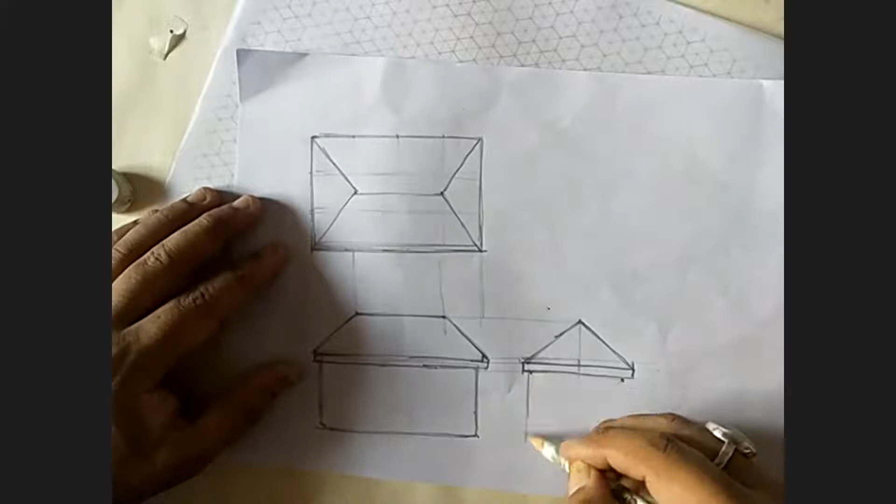Okay, so this is the one which we are seeing. Yeah, okay, I think that is more or less fine. Forget it. That's how it is, all of you, okay.

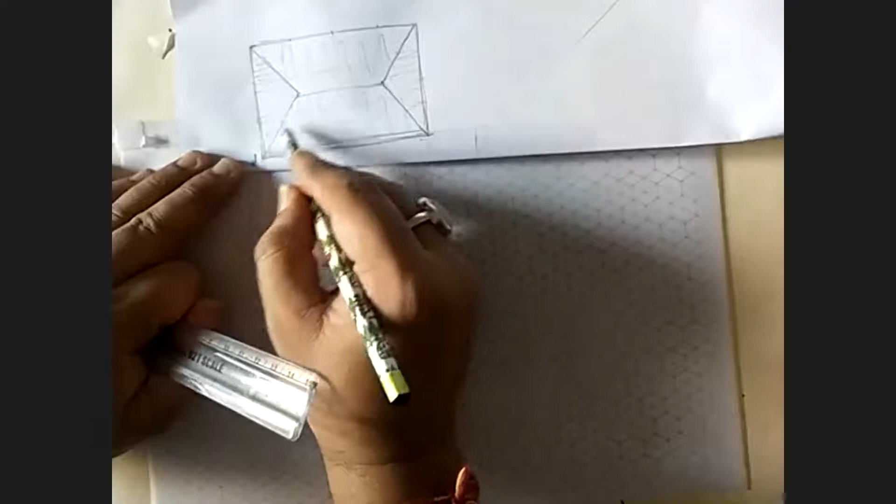So you can see my sheet, right, and you can see this object as well on the top. Yeah, I can see both. So this is the top view. So what we are going to do, we are going to see it from here. This is the point where we are going to see this entire house. We will be somewhere here. So that's what it is - we are seeing the two faces, one is this and one is this. One will be shown and one will be shown to us. And the roof will be shown - roof won't be shown, meaning it won't be visible from below, but I'm saying this is the view where we are. We are on the bird's eye view from this place, looking at it from this side.

Okay, so what will we do now to take it into isometric? We will be taking this.

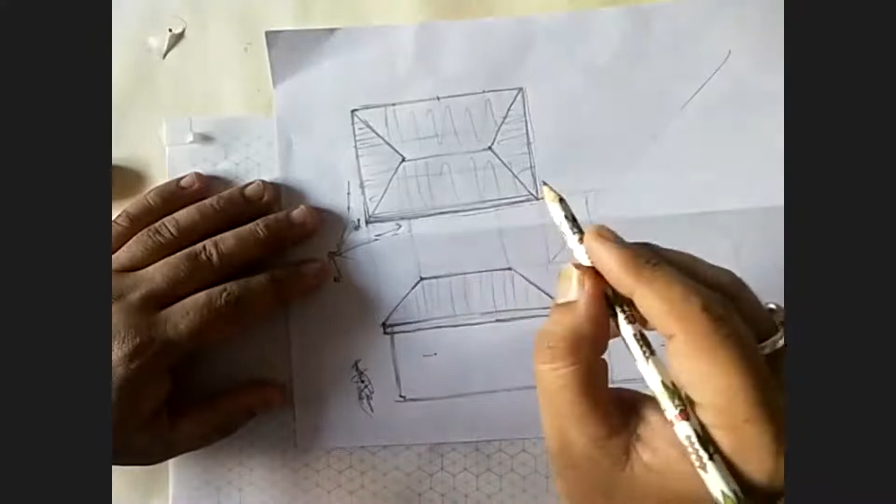First, we will divide - if you see in the drawing, this entire length which is in the front view, this is the front view. And in orthography, what we get to see is the realistic width and the length both. We don't get the height - we only get the height in the front view or in the side view. In front view, we get one of the length, which is this, and the height. In the side view, we get the width - realistic width - and the height. Here we get the width and the length. Now in this length, what we see from the picture, it is divided somewhat like in 4 parts - 1, 2, 3, 4, more or less. So one thing is clear, that length is coming in 4 parts.

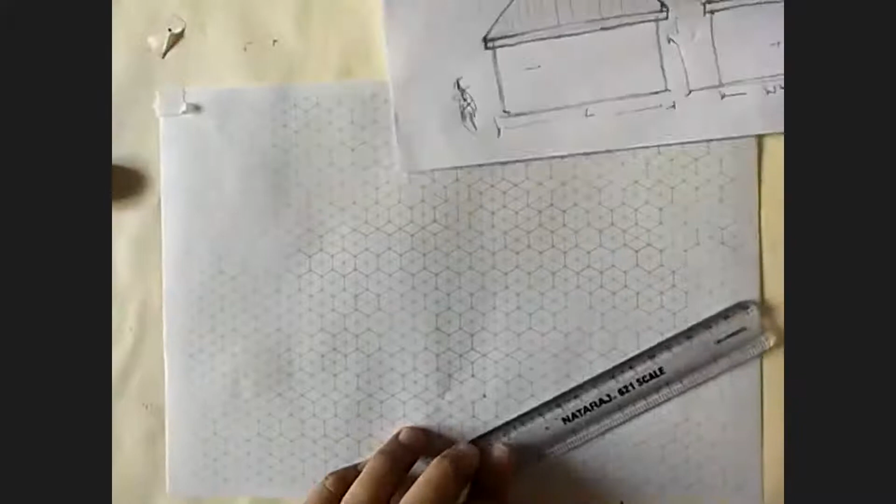Let me just do one thing quickly - let me take it here, which is 4 parts. I take my 1 unit as half, 2 units as my 1 part. Can you see that? 1, 2, this is my 1 unit, 2, 3, and 4. Do you see all? So this happens to be my front view, where I'm taking my 4 units - this will be my front view.

Now come to the side view. In side view, if you see, this is divided into 3 parts - 1, 2, 3. Okay, so let's take that as 3 parts. So we get the real width, which is this one - 1, 2, and 3. So we are getting 1, 2, and 3, that's what we are getting.

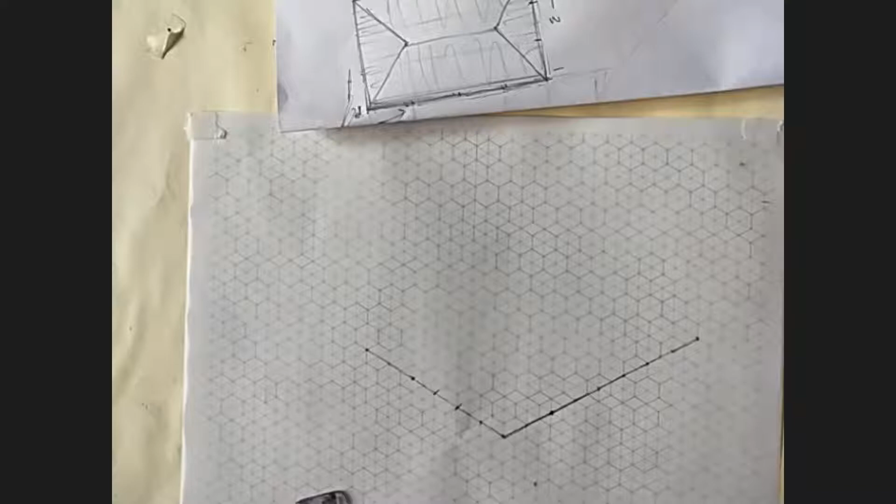Okay, I should do one thing - I think I should take it a little more down because it will cause trouble later. Sorry, I will take it from here. Four... three. Is it fine now? 1, 2 and 3, okay. And this is 4.

Okay, now what do we need to do with this? We got the front's length and the width. Now we've got to see the height. How much is our height? The height that I'm approximately understanding - this is like one complete unit because it is becoming like a square.

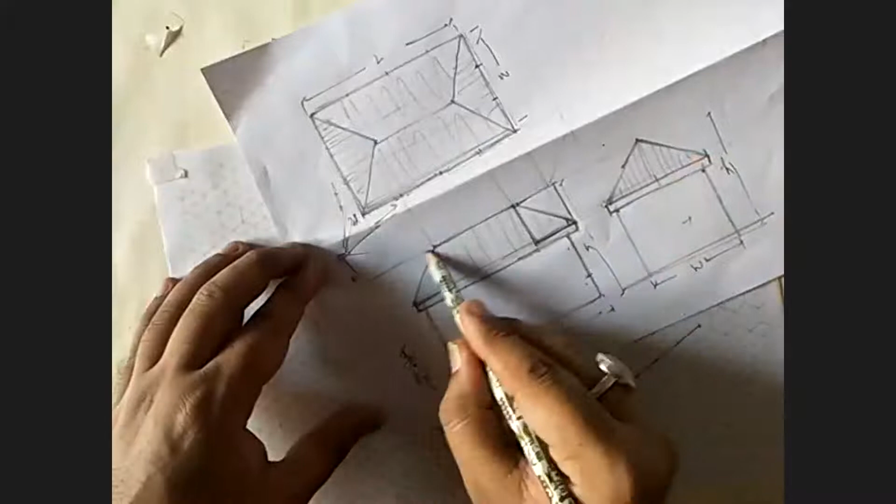Up to here, okay? So it means the height will be 1, and the lower height is approximately 1.5. So 1, 2, 2.5 - that would be the height. Agree with me? 2.5, okay. So what do I do? Here I will do 2.5. So 1, 2 and 2.5 - this would be my actual height.

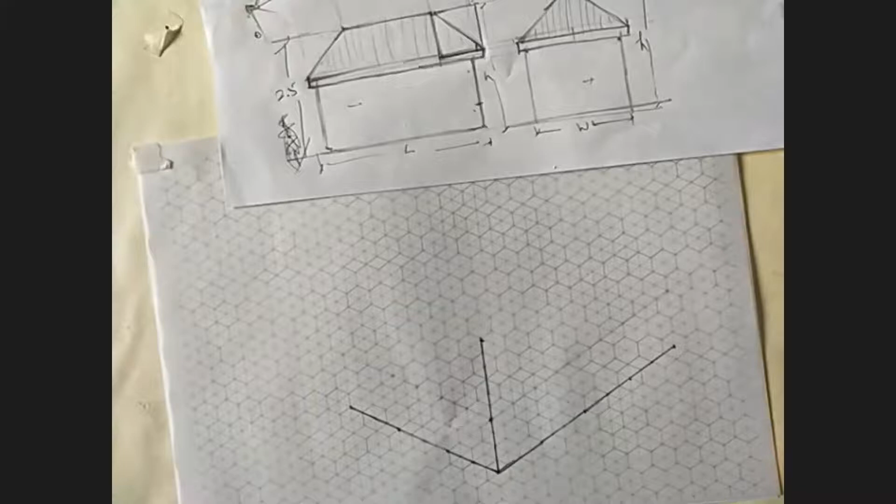Okay, so everything is going to be now - I got the axis. Remember in my isometry, I said there is an axis, and now all the lines which are parallel to this will be the isometric lines. Everything will be parallel to it, which will be kept just from the construction point of view.

So we got this box, and this box will have all the dimensions within it. This is the box. So we got the topmost height, this height, from here to here.

Now what we are going to do? We will be dropping this, and this is like 1 unit which we are dropping with. Where will the 1 unit come? This will be 1, 2. This will be the 1 unit. So here our roof will be.

Now there is something, the most important line for us right now is this line, because due to these lines there will be 4 drop lines which we will be getting. So how to locate this line? If I say this is 1, this is 2, this is 3, this is 4, this line is basically a combination of these two, so it is like 2 will be the line, 2 units.

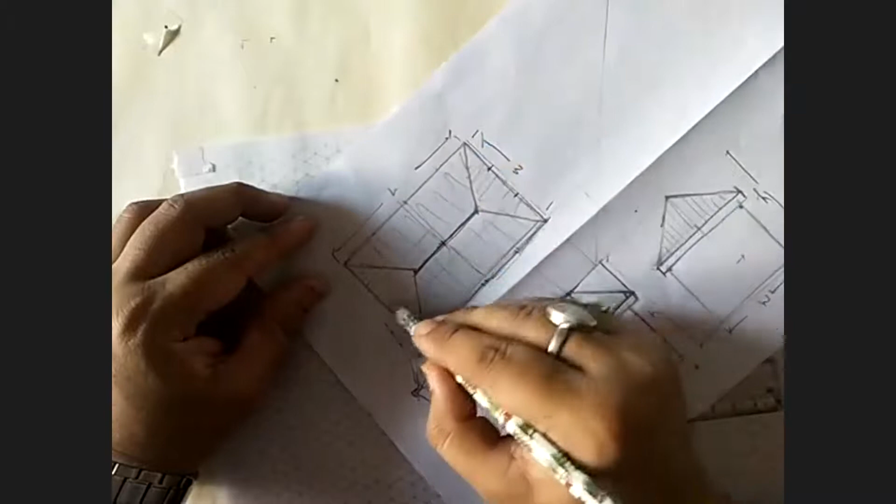Okay, where do we get this? It is right in the center of both. If this is the center, this is the center, it's coming somewhere here. So let's figure out the center of this line. 1, 2, 3, 4. So this happens to be the center.

This will go up there on the top. Now from the 3, the center would be 1, 1.5. So this will be the height.

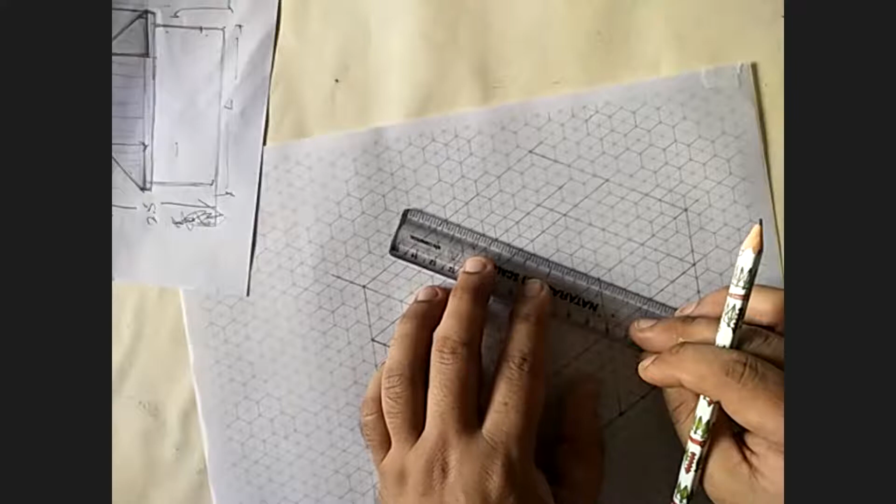And then we take it to the next. Just drop the line, a construction line. And wherever the intersection happens to be, that will be the center point of this line. This is the point which we got.

Okay, so now as I said, it is 2 in nature. So 1 is this, two. So this is that line which we were looking for. This is the line.

Now, what we need to do? We need to have this slope, which means from this point at the corner, at the vertex, the slope line is dropping, all of them. So we will drop it here at this corner. We'll make it light.

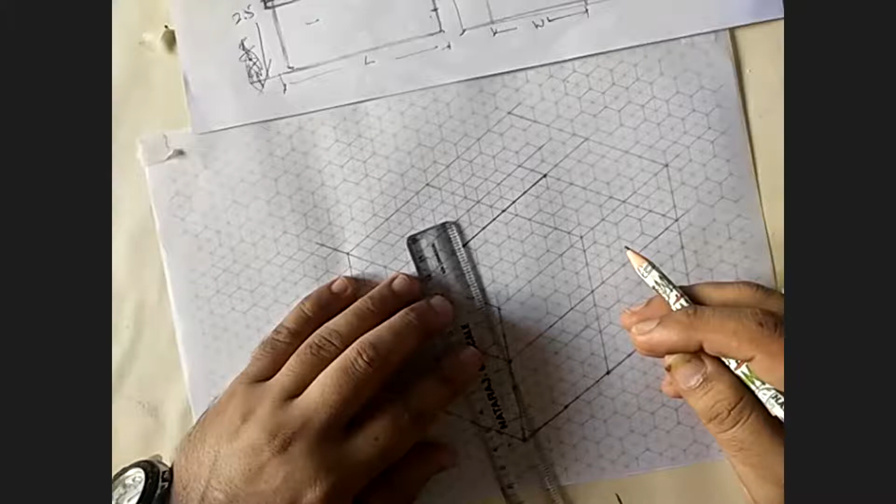And that's where our line will be coming. And the 4th will be coming here at this point, which is this one.

So technically what I've made is correct, but visually this looks a bit skewed. So it is the same fundamental which I told you the other day, why we had to use isometric as compared to axonometric, because that looks more skewed and isometric looks more realistic. Like in this case, imagine if instead of this line it was 1.5 or maybe 1, then it would have looked much more realistic, because then I would have some kind of a drop from here to here. Understood?

Are you understanding, or is there some comprehension problem somewhere? No sir, hello? Yes sir, we understand. Understanding, sir. Fantastic.

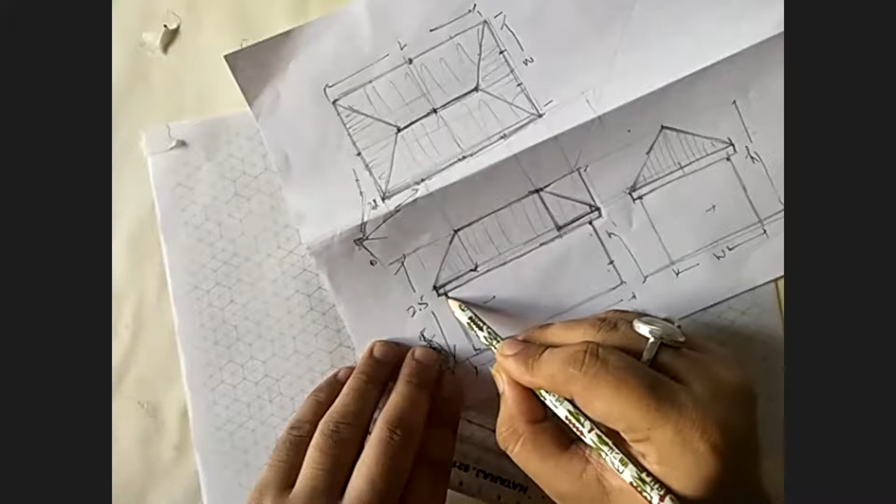Great. Now, this is the point. If you notice it carefully, it is not at the edge, it is inside this line. So I believe that this wall is falling somewhere here, with the dotted line. Do you agree with me?

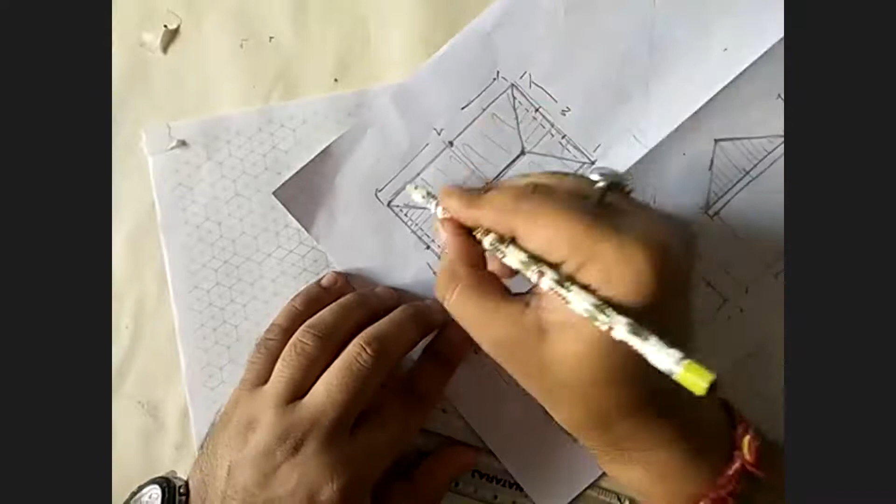Yes sir. Great. Okay, so that's how this entire thing is. There is another element which I get to see, this putty kind of a thing, there's a drop kind of a thing. So somehow I feel that this drop and these two are similar in nature. This and this will be having more or less the same dimension.

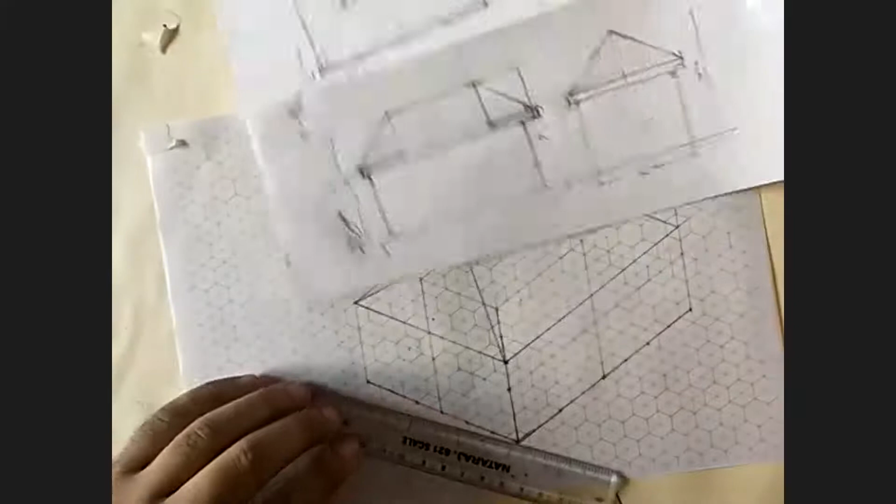Okay, agree with me? Can I take it like this? Yes sir. Okay fine, so let me do one thing. How much would that be if I say so? So I guess this should be somewhat like, just for my sake, if I divide this into this, so will be 2, 3, 4. Probably I will say it is 1/4 of the 1 unit.

If it is 1, so 1, 2, 3, and 4. For my ease, I will take it as 1/4 of 1 unit. Can I freeze it here as 1/4 of 1 unit? Yes sir, yes sir, okay.

Similarly, as I said, it is 1/4 of 1 unit, and this will also be 1/4 of the 1 unit, because more or less they are the same in nature in terms of their dimensions. I'm picking them like this.

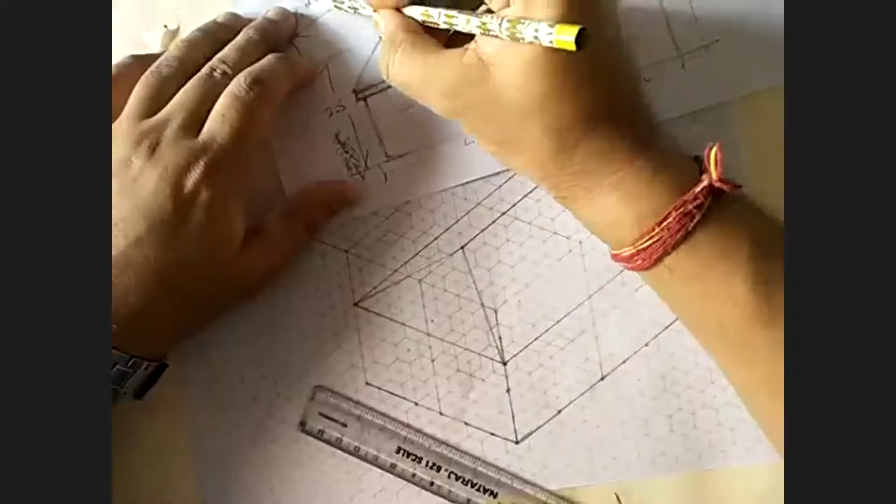Okay, so what I do, if this is my extreme corner, this is my vertex, this is my corner, so where is this? The intersection of this is 1/4 inside. Okay, so let me do one thing.

Let me first figure out if this is my 1. Okay, this is my 1 unit. So 1/4 will be 1, 2, 3, 4. So my 1/4 will be here. This is my 1/4. And where would this other 1/4 be? Okay, let me check.

Okay, so let's say this is my 1 unit. So 1/4 will be this one. Similarly, 1/4 will be this one, and wherever they are intersecting, this is the point for me. And here also, similarly, the point will be here, and similarly here it will be this.

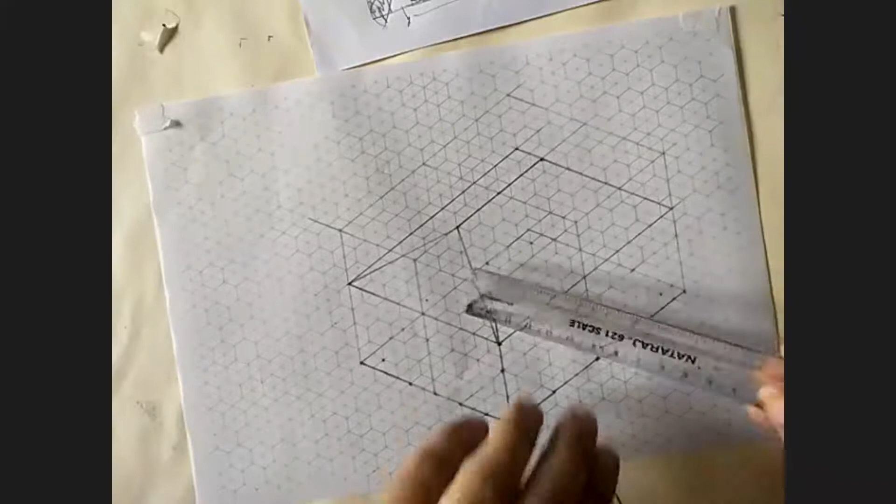Okay, and this is one complete thing. One is this, so 1/4 will be this. This is the point. So what I'm going to get is actually this is the wall which I will be getting. This is the area, my wall is actually falling here.

So this is my hut. Okay, now what do I need to do? 1/4, as I said, it will be going down, right? So where will this be coming? This will be coming at 1/4.

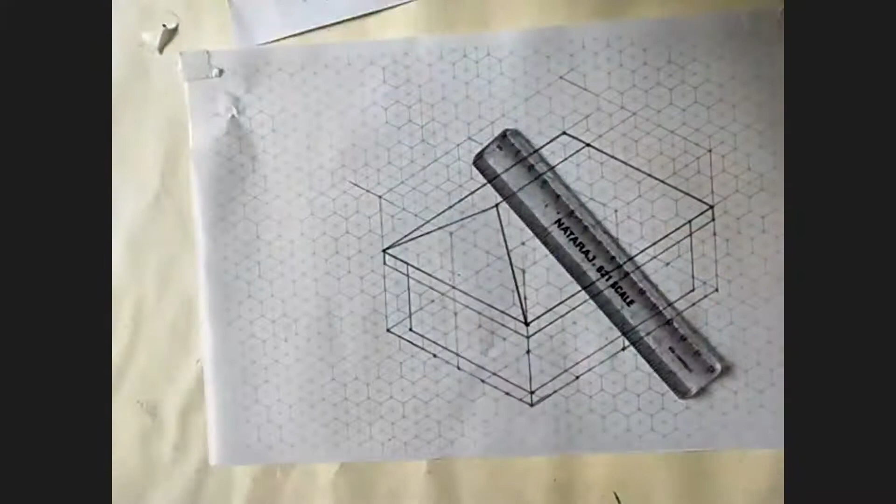Anything? Easy? Tough? Yes, sir, yes, sir. With the grid, it's easy.

इसने क्या किया, अभी अपना सेट स्क्वायर साइड में रखा 45 डिग्री एंगल पे। जिस मोमेंट इसे 45 डिग्री एंगल पे रखा, सेंटर वाला 90 डिग्री होगा, ऑटोमेटिकली इधर 45 डिग्री होगा। You don't have to measure it. एक 45 पे रख लिया। Why is it realistic? As I told you, 90 डिग्री पर हम बनाते हैं, and then it goes at the 45 डिग्री एंगल।

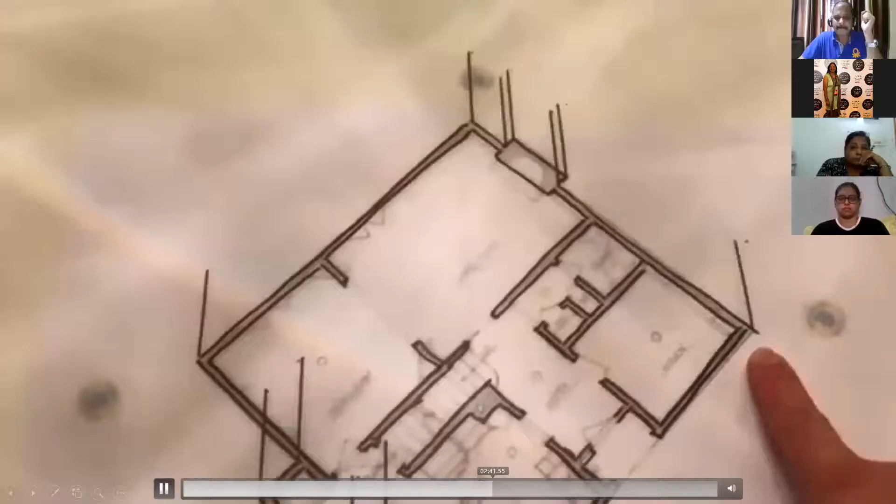इसमें हाइट ले लिया, इसने हाइट को मेजर कर लिया, दैट्स इट।

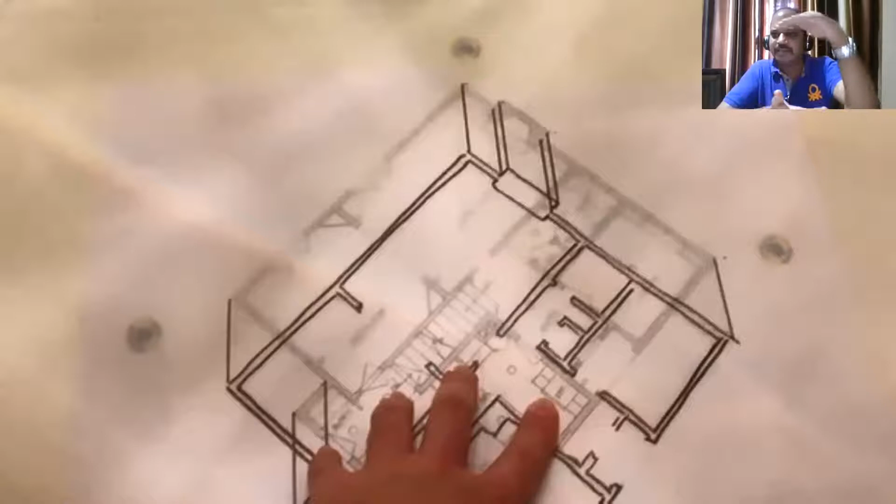Okay, so what is he saying? That floor plan becomes the ceiling plan. The moment you elevate it with a particular distance, it is fine. It is absolutely fine. But this is easy when you are having the floor and the ceiling same. But if you are not having the roof, because roof is a separate part, maybe we can take it off, and when we are showing only the wall portion, then it is absolutely fine. But inside the wall and roof, we need to place some points there.

Jasmine, you are on mute. राज, जैसे आपने प्लान में डॉटेड लाइंस ऐड की थी, जब आप वो डॉटेड लाइंस ऐड करके उस प्लान को लगाओगे, तो आपको वो लाइंस भी मिलेंगी। तो वो पॉइंट्स आपको ऑटोमेटिकली मिल जाएंगे। यह बेसिकली सिर्फ प्रैक्टिस की बात है।

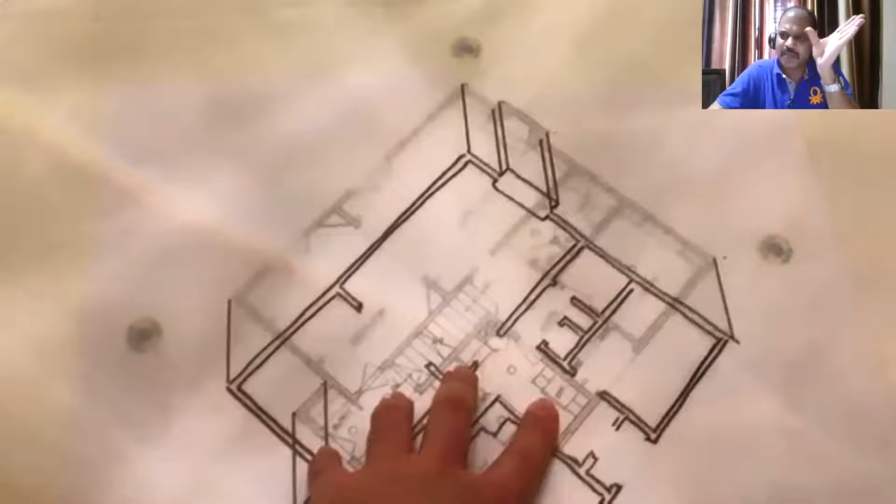और प्लॉटिंग पता होनी चाहिए कि आपका ऑर्थोग्राफिक की जो ग्रिड होती है, उसको आप आइसोमेट्री के ऊपर कैसे प्लॉट करते हो, दैट इज द मोस्ट इंपॉर्टेंट पार्ट। अगर ऑर्थोग्राफिक में एक यूनिट है, because there are some details which you need to show, or you are having a very big sheet of isometric, so you can take one unit of ortho as 2 units in the isometric. You can scale it up or down, it's all up to you. So this is the crux of the entire exercise which I had shown you.

Now I will be showing you something which is how to draw the circle.

ओके अभी हम क्या करते हैं, हम सर्कल को आइसोमेट्रिक व्यू पे ले जाने के लिए पहले ऑर्थोग्राफिक लेते हैं और उसके बाद उसे नीचे इस पे ले जाते हैं। अगेन व्हाट वी ट्राई टू डू विद आवर गट फीलिंग्स, बट देयर इज अ सर्टेन वे एंड सर्टेन रूल विद व्हिच वी डू इट।

Okay, so again, I'm going back to my sheet, just bear with me once again.

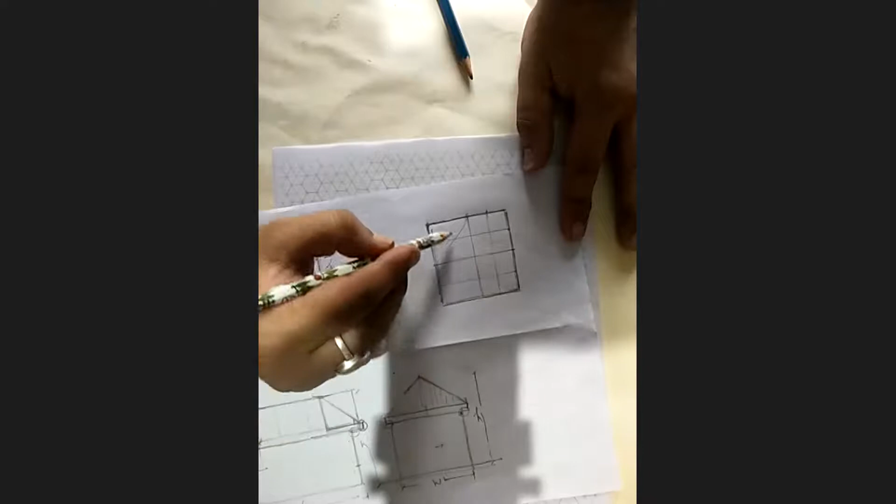So first of all, the basic unit would be the square which I will be taking. Let me just divide it into half. Okay, I divide it into half like this. Again further I will divide it into half. If I want, I can further divide it into half, the lightest one.

I hope till here it's all fine, right? Okay, that's not the line to be considered, forget about this.

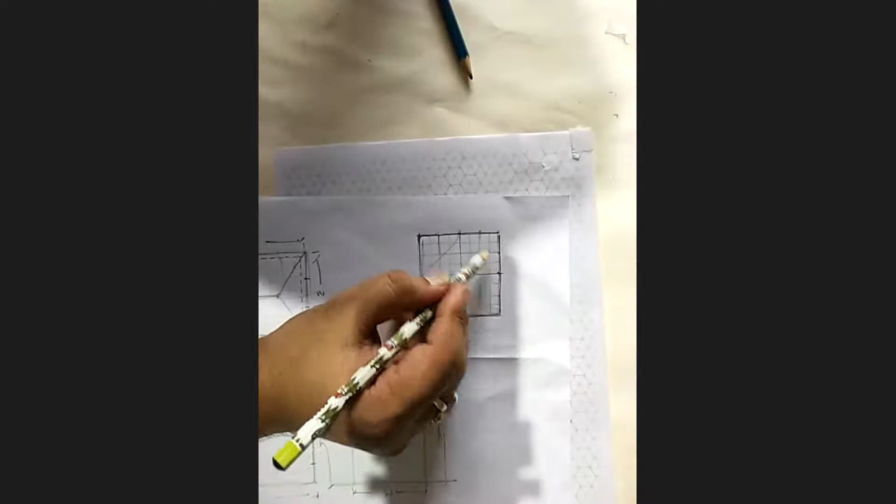So what I do, when I do the round, when I do the circle out here, there are 4 points which the circle will be touching at, these 4 points. Agree with me? Not the vertex, but at the edge. And it is going to be something like this for sure. Now, how do I get this curve? That is the most important part. So what do I do on this one?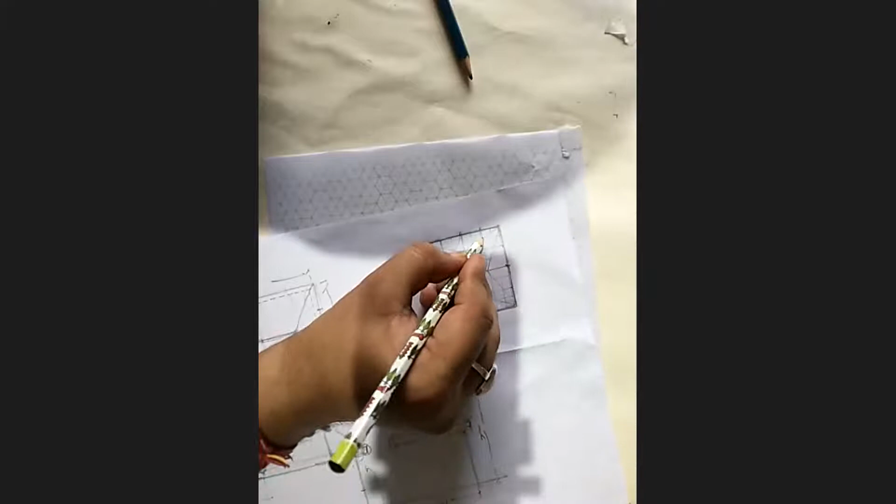I will make a star here, and join it at this point. The more divisions you do, the smoother the curve will be. But just to get a gist of it, this is the best way. When we do something like this, what is happening is I'm getting an intersection out here - intersection of this line and this vertical line, and another intersection here.

So what do we do? From this point, I've got this curve. Do you see that? Agree with me? Hello, are you there with me? Yes, okay, keep giving me some feedback, say yes or no, so that I know you people are there.

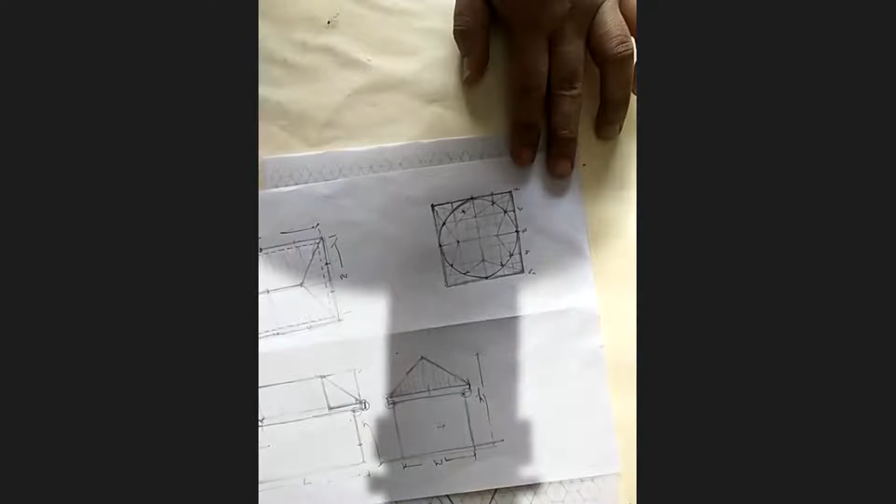Okay, so that's how the plotting has been done of the circle on the orthographic sheet. Now the same needs to be taken onto the isometric grid. If I say this is 1, 2, 3, 4, 5, similarly 2, 3, 4, 5. Let's take it there and see what happens.

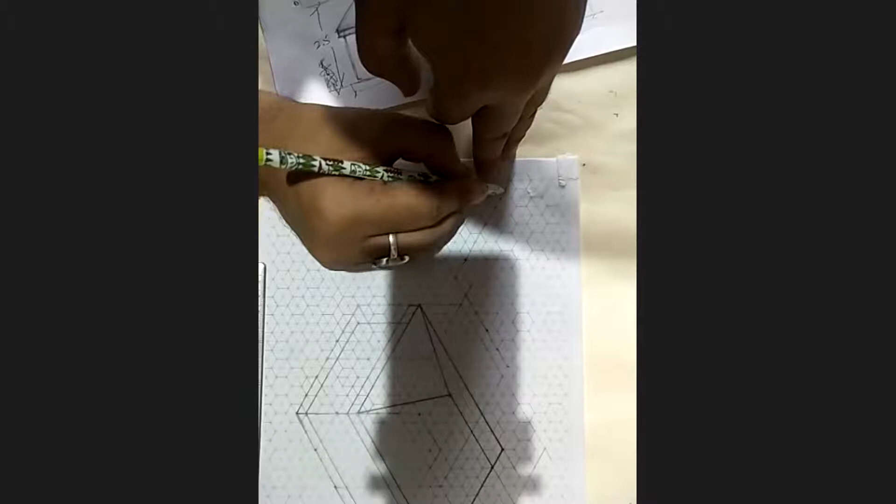I will take it from here. This is my 1, 2, 3, 4, 5. 1, 2, 3, 4, 5 - no, it will go out. Okay, this is here. 1, 2, 3, 4, 5. So big.

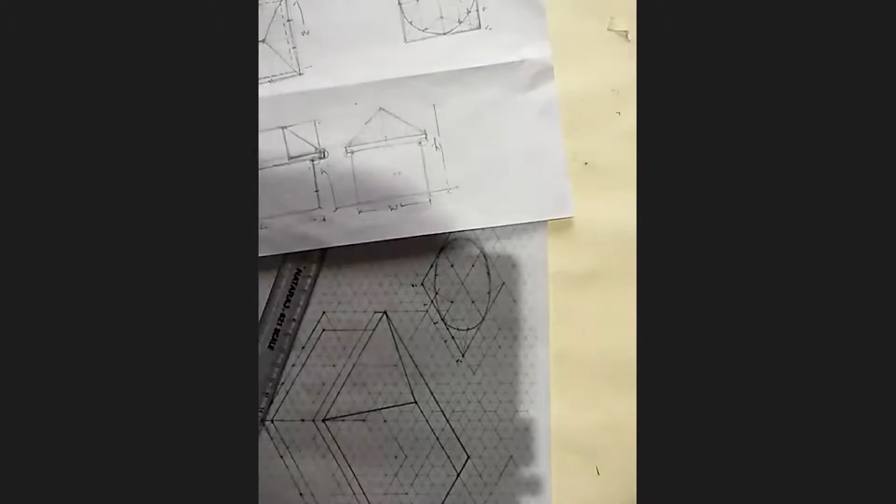This is our circle. That's how we have plotted the circle on this grid. Okay, just see what happens if I put it out here. What happens if I put it here? Let me try it a little higher up. Will that give me something smoother? I don't know, let me see.

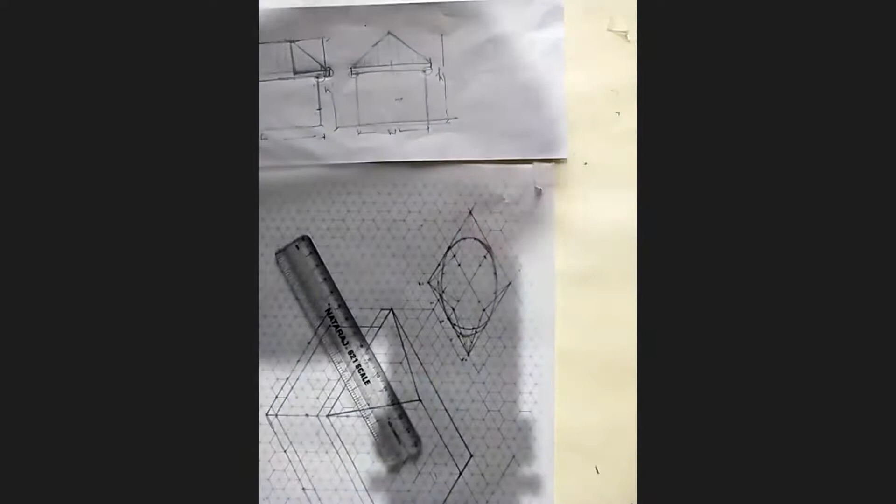There's a possibility with the outer one as well, which I can figure out, but that will be a little too complicated, and that is basically to get a much more smoother curve. But I would suggest just stick to one right now and work on the internal one - just one point, I think that's best, otherwise it will be too complicated.

Okay, so that's where something like this was done earlier. Okay, let me go on to the main screen now.

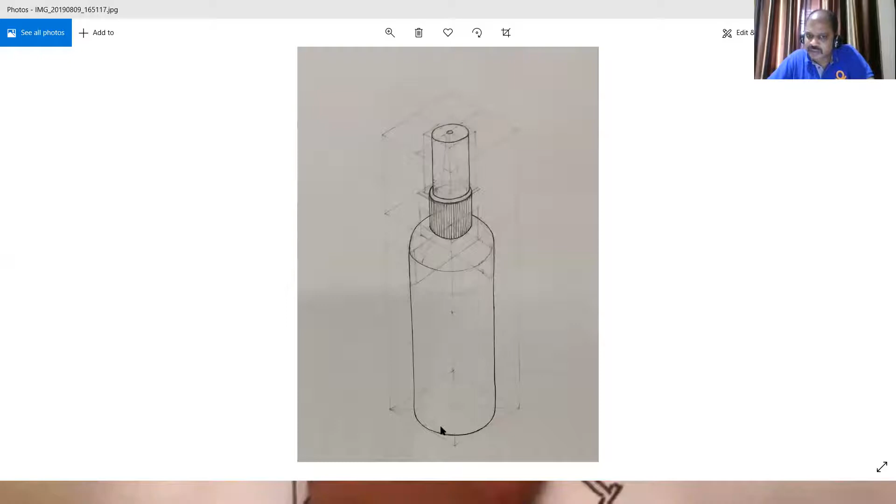अब इसमें जैसे एक प्रोडक्ट को लिया है, उस प्रोडक्ट पे उन्होंने किस किस चीज को प्लॉट किया है? अपना ऑर्थोग्राफिक लिया है, ऑर्थोग्राफिक को इन्होंने इसके ऊपर प्रोजेक्ट कर दिया है ऑन द आइसोमेट्रिक. So everything is coming in the cube. Actual height इन्होंने इस पे लिया और height को उसके अंदर that round thing, they plotted inside the cube.

So you got the actual width of the bottle, similarly the actual height. And not only that, if you see very closely, this is a dome which has been made, it is not just the circle. It is a dome. So on the circle, some height has been given and then two lines have been projected like this, so it becomes a dome.

Next पे कैसे जाऊँ इस पे? Use your arrow keys, maybe that might work. अभी आ रहा है? हाँ, आ रहा है. बड़ा दिख रहा है? Yes.

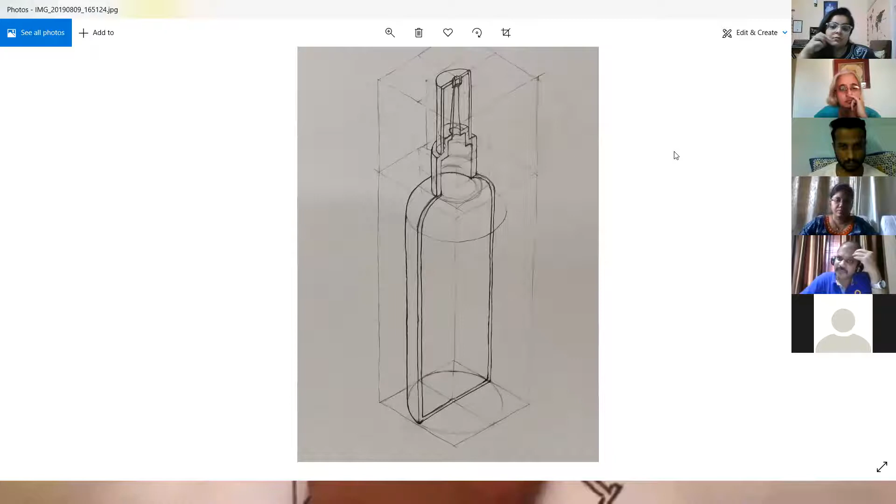ठीक है. So after that, what it's been done, it has been cut into the half, so you get to see the thickness of the object. Okay, I will just take you through the objects, like this.

The circle has been, how it has been derived. It must be on the top, the first one. See the object, this one.

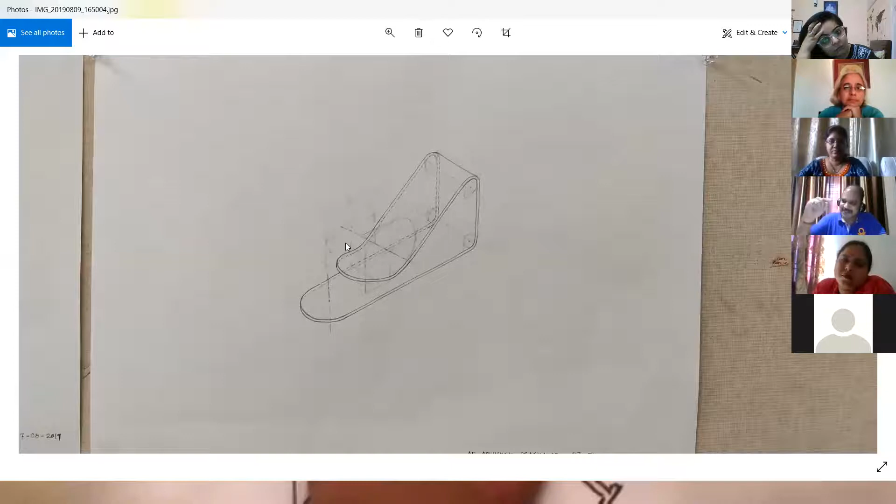I just like to point out something, especially for the ID people. जब आप ये drawing, can you go back to the paperclip, जो 3D view था उसका, yeah this one. So if you look at this, आधे से ज्यादा लोग, I am very sure, यहाँ ID के बैठे हैं, they're thinking कि ये तो इतनी simple चीजें हमको दिखा रहे हैं, what's the whole point, we are wasting our time. But this is something which is very important when your students start working in AutoCAD.

जब वो AutoCAD में जाते हैं और उनको 3D में imagine करना नहीं आता, क्योंकि जब आप free hand बनाते हो तुक्के में कुछ भी बना लेते हो. जब आपको AutoCAD पे बनाना है आपसे कुछ नहीं बनता, because आपको angle नहीं समझ आ रहा, आपको कुछ पता नहीं लग रहा कौन सी चीज कहाँ जाएगी. So to understand that, if you can draw this exactly like this with hand, you can draw it on AutoCAD.

But AutoCAD है क्या? What is AutoCAD? It is the one which is just a tool. Yeah, that's what I'm saying.

पर लोग क्या करते हैं ना, इसको बनाना है तो सब तुक्के में बना देंगे. It'll look okay, it'll look कि हाँ ठीक बना हुआ है, but they will not use the precise method. That is my point. Absolutely. जो आपने ये method बताया है कि वो circle बन रहा है उसके ऊपर और side पे भी circles आ रहे हैं, कोई इतना कष्ट नहीं करेगा. सब उसको बनाएंगे डब्बे में और उसको हाथ से गोल गोल करके बोलेंगे लो जी बन गया.

Jasmine, that's the idea, that's the idea. That's why I want even the fashion students to think—must be thinking कि this is such a waste of time.

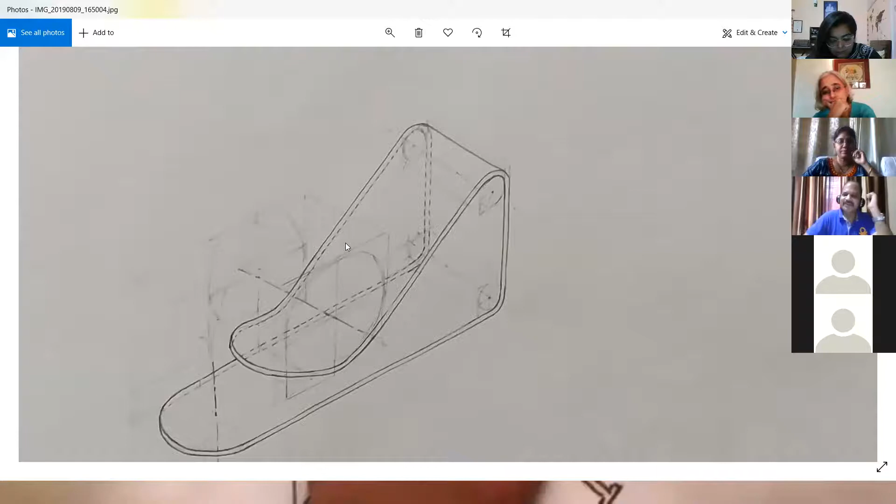वही है, एक छोटा सा ऑब्जेक्ट बनाने के लिए what all one has thought of, that's what will be understood. Decode करना is the most difficult. सबसे ज्यादा कैसे उसने किया होगा, that decoding one will get to understand from this.

Look at this. Now one of the most complex parts, this one, a top. इसके अंदर क्या क्या complexity है मैं बताता हूँ. If you see from the top, this ये लट्टू है, if you see the plan view of this top का, तो इसके अंदर जो ये वाला portion है, the top portion is absolutely round, which is this one, ठीक है?

लेकिन जो ये वाला portion है, this one, not only this was—सामने से देखोगे तो वो ऐसे था, एलिप्टिकल में थोड़ा सा, फ्लैटेंड है ऊपर से, हाँ ऊपर से फ्लैटेंड है, कैन यू सी दैट, थोड़ा थोड़ा सिलेंड्रिकल में और ऐसे बना हुआ है, आगे से थोड़ा सा एब्सोल्यूट राउंड नहीं है, हल्का सा उसमें इस तरीके से वो है, कर्व है, which is more of an ellipse kind of a thing. Very difficult to achieve this.

Hats off to this girl who cracked it. बहुत problem लगा, but she took it as a challenge and she said, I will make sure that I decode it, and she did it. So good, fantastic. Look at the way, the kind of precision she has gone to achieve this. Okay, what all she's gone through.

Can you see that how many layers she's worked upon? For outer one, this is the one which she has drawn. For inside one, also again she has drawn. उसके अंदर वाले में भी किया है, सबके लिए उसने किया है.

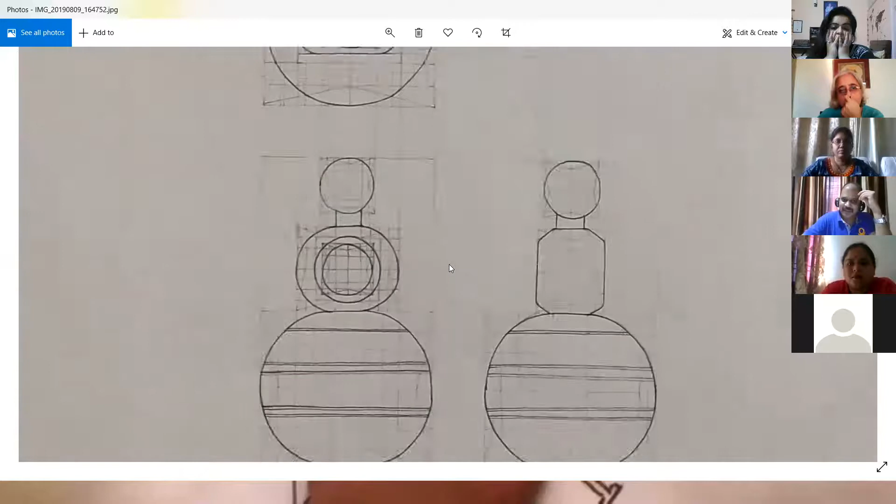Look at this. Look at this. And now this is done. Orthographic was still fine, but the most important part was this. Now see. Now that's where the magic comes.

Looks like a Leonardo da Vinci ka sketch. Can you see? This is the one which I'm talking about. Imagine so much of—I mean, you got to have patience to do all this, seriously.

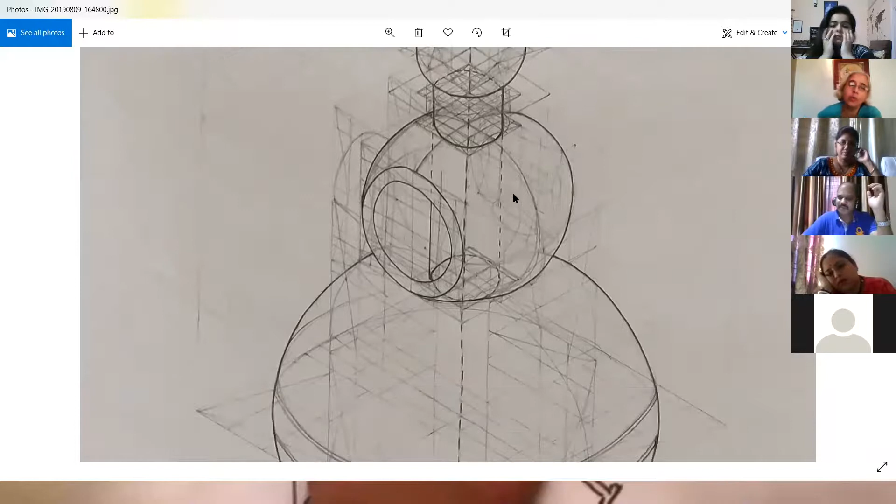Absolutely. आप ये देखो, यहाँ पे उसने जो ये दिखाया ना इस वाले को, कैसे उसने बनाया, बहुत tough था इसको, but she cracked it. She really cracked it, and finally, you get a sense of pride कि yes, you achieved it, and very beautifully she picked it up. The whole point and the whole basis of cracking it is कि you've understood it, कि कौन सी चीज कहाँ से किसके साथ join हो रही है, कौन सी चीज में क्या बन रही है.

That means you've actually understood. अगर आपको इसकी constructional detail भी बनानी हो ना, आप बना सकते हो, because you've understood how the various parts are working, कौन सा किसके साथ कहाँ जा रहा है. So that is something which we somehow don't clarify to the students कि ये time waste नहीं है, ये कोई हम मजाक नहीं कर रहे हैं. This absolutely is a very very basic idea. अगर आपको ये आ जाता है, no, you can draw anything, you can understand anything if you got this.

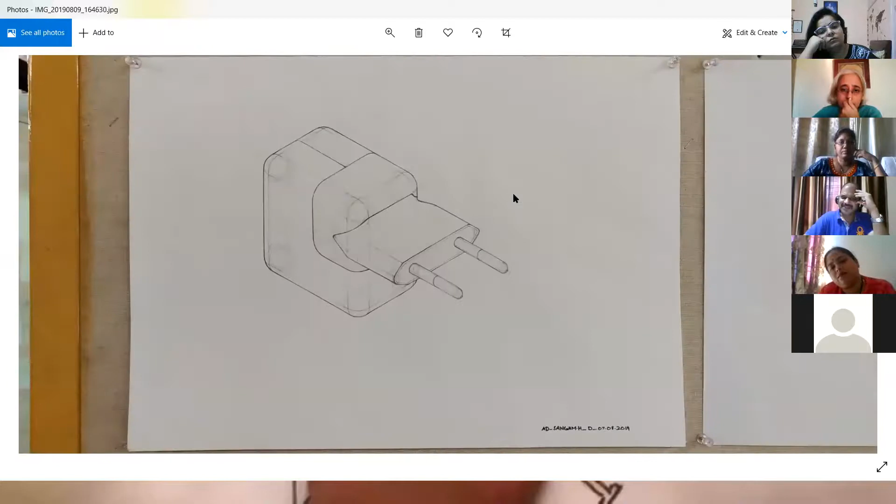ठीक है, look at this. Now what? Again, a simple one, but see how this cuts into the sections. There's another exercise. ये बहुत अलग है. मैं वही कह रहा हूँ. See, this is the one which has been picked up by—and all these are students, first yearites.

Foundation वाले student हैं जिन्होंने किया है. Just have a look into this portion, ये beauty है. वो जो पीछे को curve गया है, उसको कैसे decode किया है, पूरे circle को बनाकर उसके ऊपर तीनों axes में उसने इसे decode किया है. He has plotted it on 3 axes.

और फिर उसको करने के बाद, this has been... oh my god, that stapler - हम स्टेपलर नहीं, वो जो clothes pin होती है, clip for drying clothes, वो clip बनाया है. इतना हम daily देखते हैं उस product को, just have a look at the complexity of it.

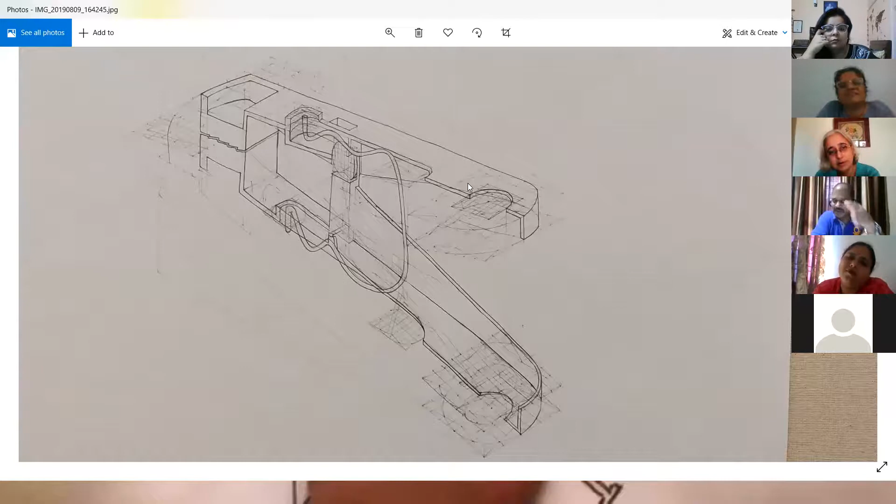Whose mic is on? ठीक है, this is the one.

This is the clip, the same clip. Okay, that was a sectional part of the clip. Look at the orthographic of the clip.

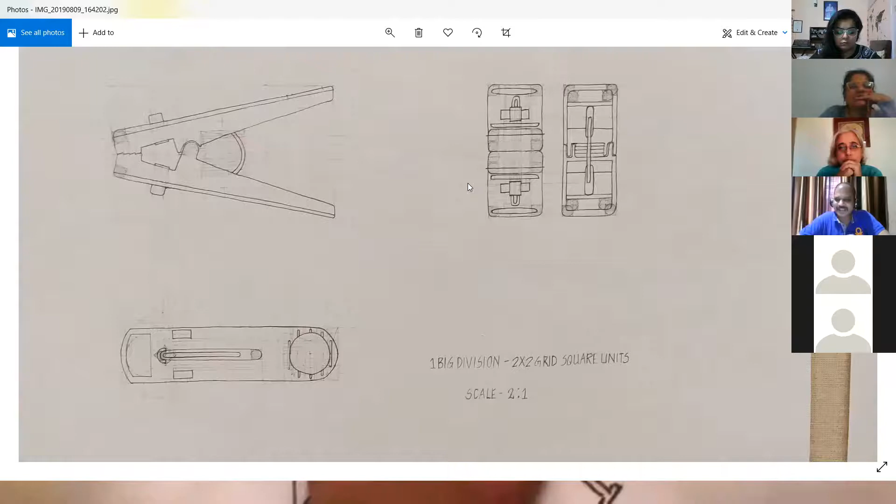Very nice, ठीक है. So why I'm showing you all this, just to give you some idea of what all you see, what all you do. Look at this, look at this.

Orthographic view - so first orthographic view, then isometric, and then the sectional view. We do this in ID, don't we? Absolutely, we do this.

There's another exercise, something else which I'm taking, another one which I will take you through - how the tube bends in the space. This was one of the exercises.

Anyways, so what do you say about these two? Okay, I will give you one exercise, a small exercise, it's like a crash assignment. I will draw it for you, don't worry, I'll fill it all and give it to you.

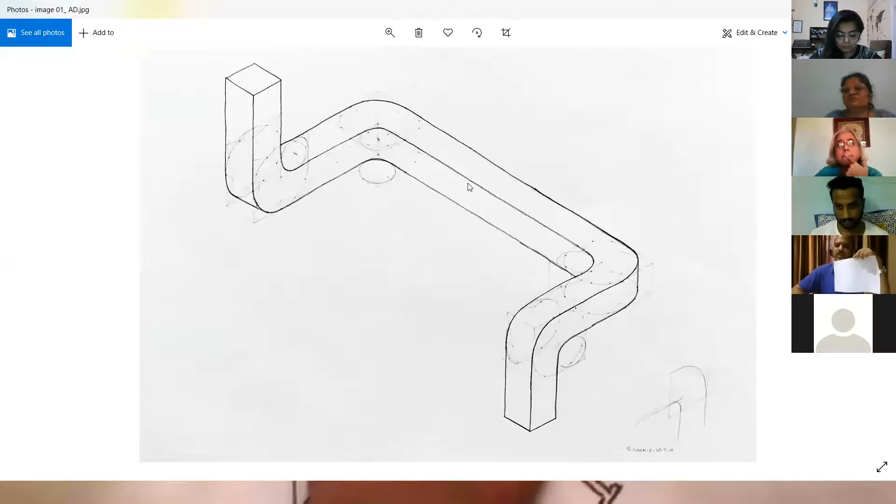Can you see this image? No, see the last one that you were showing, that pipe. अच्छा, मेरा इस पे नहीं दिख रहा क्या? Camera में नहीं आ रहा. अच्छा, I need to stop sharing, right? Yes, you need to stop sharing.

A donut? Yes. Okay, can you reduce the volume please? Yeah okay, who's got this thing going on? Okay fine, so there are two circles which I showed you, correct?

And this is the top view, the plan view. Every time I need to see, this is the only plan. You make how many objects you want.

Jasmine, I think you got it, what I'm saying. Yeah, I got it. Good, thank you Jasmine, आधी चीज तो आप ही मेरी solve कर देते हैं. बहुत बढ़िया, अच्छा चलो मैं एक छोटा सा example देता हूँ. Let's see, ठीक है?

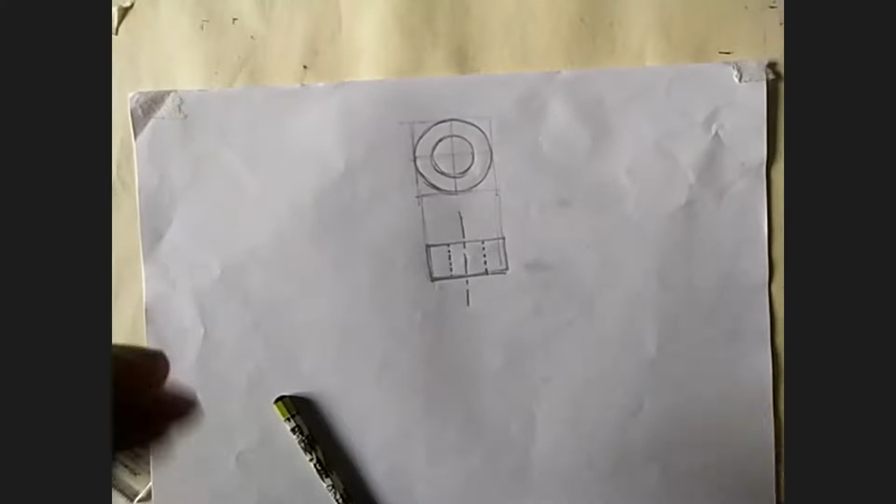Can you see my sheet now? Yes, just put it the other way around because हमें portrait में दिख रहा है. अच्छा, हाँ. अभी ठीक है? ओके, हाँ अभी क्लियर है सब कुछ?

ओके, सो इस वन में मेरे पास ये मेरा plan है, plan. मैं इसको ऐसे देखूंगा, ठीक है, क्लियर दिख रहा है? बिल्कुल दिख रहा है।

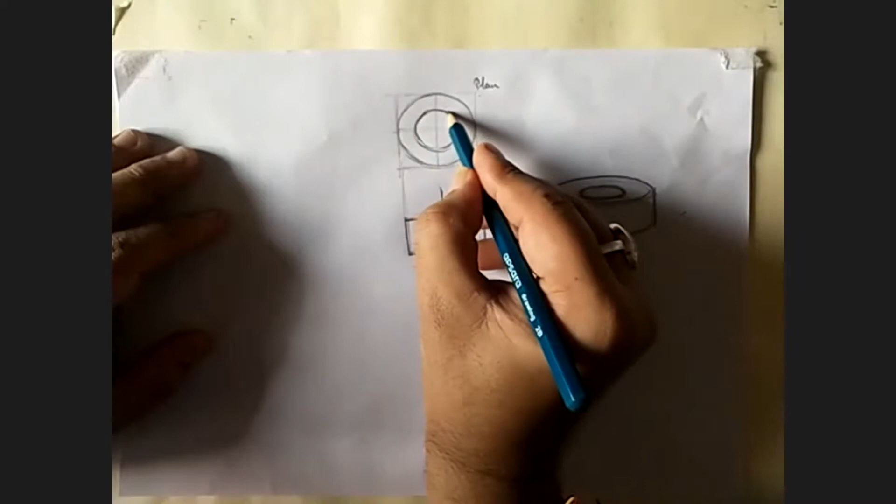मेरा एक plan ऐसे दिख सकता है इस वाले object का, बिल्कुल दिख सकता है, ठीक है? ये वाला plan मेरा यही है, ठीक है? या ओके, क्या मुझे अगर मेरे को एक ऐसा बनाऊं इस टाइप का, क्या मुझे ऐसा plan दिख सकता है?

टॉप, यस और नो बोलो। यस सर, यस दिखेगा मेरे को? Yes sir, सेकंड लाइन ऐड हो जाएगी प्लान में, अदरवाइज yes दिखेगा। कौन सी वाली प्लान में ऐड होगी लाइन?

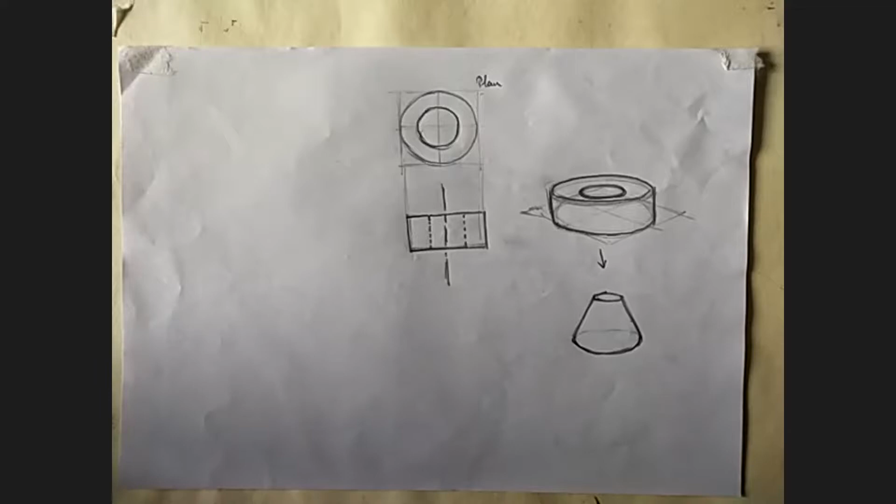प्लान नीचे में, नीचे वाले बॉटम डायमीटर ऐड हो जाएगा। तो वो तो यहाँ पे भी है, वो तो इधर भी है। This one, sir.

एक सेकंड, ये आपको इसमें दो क्लियर लाइन दिख रही है, एक लाइन ये है और एक ये लाइन है, ठीक है ना? आपको एक टॉप लाइन ये दिख रही है, जो टॉप वाली ये है, और बॉटम वाली ये है, ठीक है?

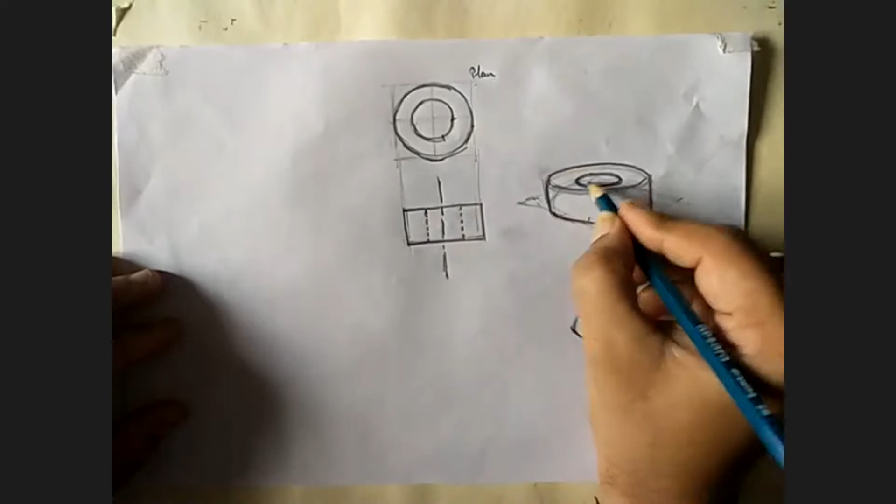इस वाले ऑब्जेक्ट के लिए प्लान व्यू सेम रहेगा। इस वाले में आपको ये लाइन दिख रही है, और यहाँ पे मैंने इसको डॉटेड बना रखा है, यानी कि ये हॉलो है। इसमें मेरे को ये टॉप लाइन दिखी एक, और एक ये वाली लाइन दिखी, इसके अलावा कुछ नहीं दिखेगा। इट मींस ये इसको सेटिस्फाई करता है, ये भी इसको सेटिस्फाई करता है।

क्या ऐसे और बन सकते हैं क्या? बहुत से बन सकते हैं। वही है, यहीं पे ये दिमाग जो करना है। लेट मी जस्ट सी कौन मेरे को 10 बना के दिखा सकता है, 10 ऑब्जेक्ट। चैलेंज है, चैलेंज है।

5 तो कम से कम है, मेरे इन दो को छोड़ के 5 तो कम से कम है। इन दोनों को भूल जाओ अभी, 5 तो कम से कम है। किसी ने अगर 10 अचीव कर लिया तो मेरी तरफ से उसको एक पार्टी, एक कॉफी तो जरूर बनेगी, ठीक है? अब करो, है चैलेंज है, मजेदार है, बिल्कुल बढ़िया है।

Sir, excuse me, the question I just want to know. Yeah, tell me. This is one circle and the rectangle underneath, two circles, and we have to show the actual diagram 3D, what 10 or 5 which will come into this, right? Okay, that's what is the question, na? We have to make the 3D. The thing is, the plan has been given.

Forget about that square, नीचे वाला जो बनाया rectangular, उसको भूल जाओ। आप सिर्फ प्लान पे ध्यान रखो, जो प्लान है वो आपको दिया गया है। उस प्लान को आप कैसे कैसे इंटरप्रेट कर सकते हो इन अ 3D शेप, दैट्स अप टू यू, दैट्स द चैलेंज।

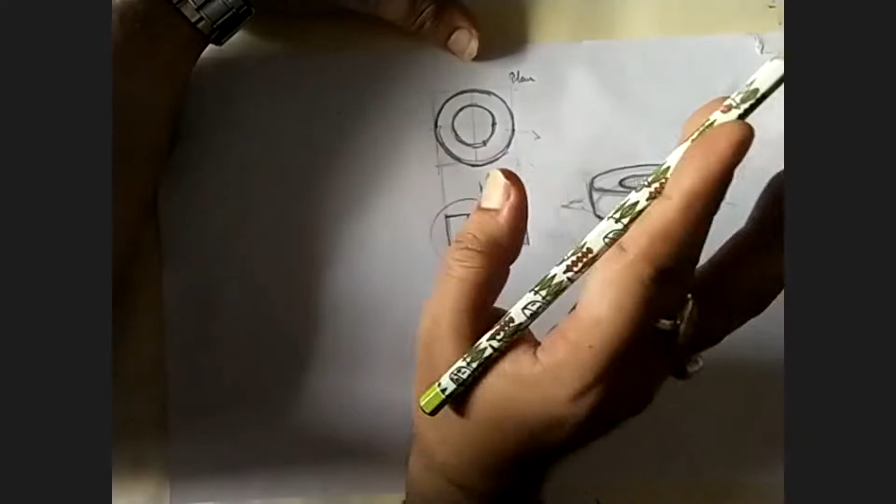Fine? Sandra, I will just make your life a little more easy. This is a fixed thing. This plan is a fixed thing. I have given you only this much of information, only this much, that is it. I need to see, when I see from the top of the object, I should be seeing only this plan, nothing else. These two points.

All up to you how this object is. Like I showed you, this is the same plan of this object. Yes, this is the same plan for this object as well. There are so many of them which you can show me.

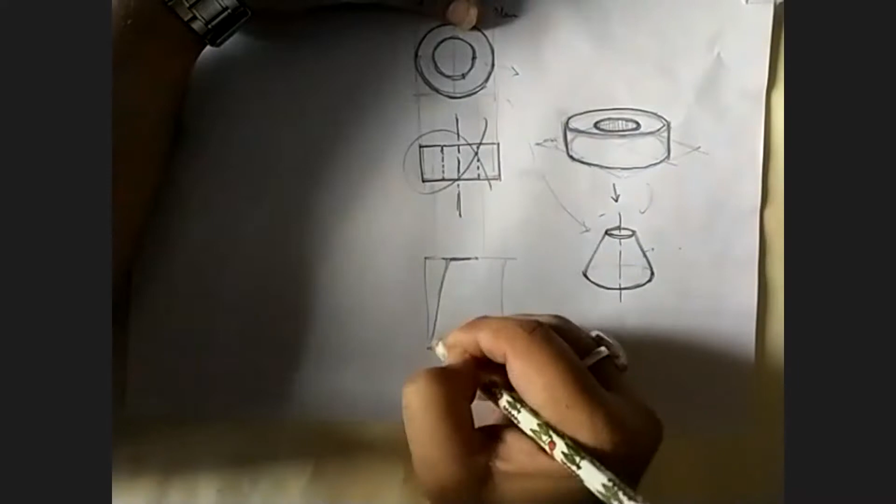Okay, so when you make this, you have got like this front view and the side view. When you make this, you have got something called the front view and the side view. Like the plan is already made. So if you do the front view, you will be having something like, just drop it down. So something like this will be the, if I say yes, okay.

Be very careful because since it is a circle in the center, so it is all going to be like this. You understand, this is the axis line which I talked about, okay? So now you can have the multiple which you can do like this, considering the fact, the consideration and the constraint would be that plan remains the same, and then after that you need to plot it onto the 3D.

Okay, so 5 I'm expecting. Or shall I make little less? नहीं 5 तो रहने दो, बाकी इनकी श्रद्धा जितने और बनाएंगे। चलो ठीक है, 5 तो चलो जसवीन और मैं हमने बहन जी ठीक ठीक लगा लो वाले पे आ गए। ठीक है, हाँ तो ठीक ठीक में 5 वाले पे आ गए।

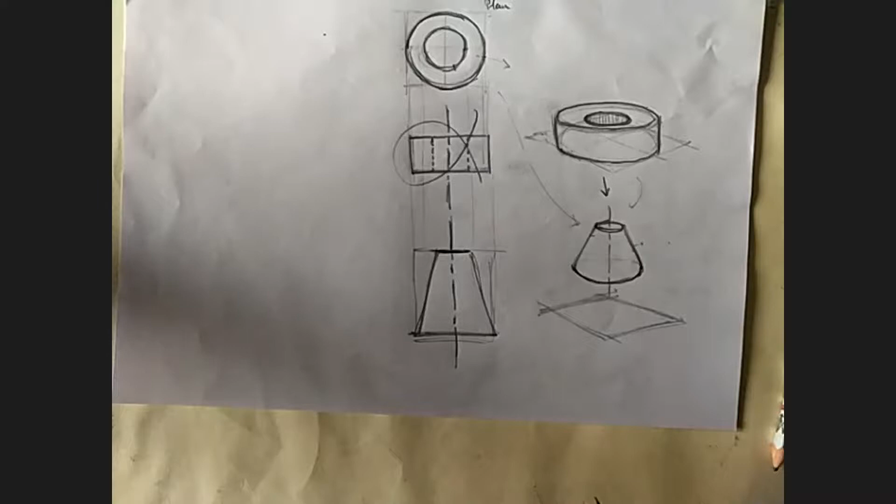5 आप बनाएंगे, 5 we will be making. Okay, apart from these two which I've shown you, और उसके ऊपर जितना भी होगा that is like a bonus point for all of us, ठीक है।

सब चुपचाप बैठे हैं, या तो yes. नहीं है, थोड़ा दिमाग की भी एक्सरसाइज है, मजा आएगा तभी तो। We can expect from the students if we do ourselves, you know, gear up, ठीक है ना?

Sir, I made 3. Can I show? हाँ, just a minute, hold on. Let me come to my this.

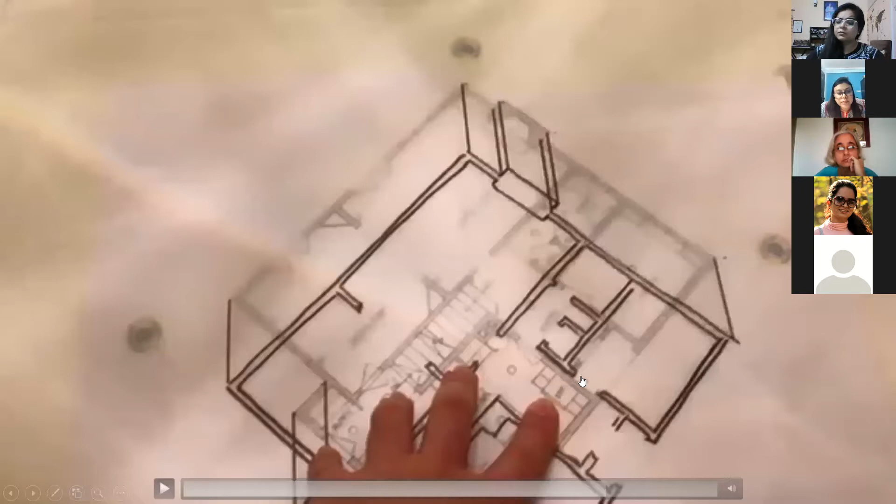Can you see my screen please, all of you? Yes sir, okay. Now tell me.

What is isometric? What is perspective? What is axonometric? And what is orthography? I'm telling you four things. These are 4 tools with which we visualize something or depict something. What is the difference, the key differences between all 4 of them, or the characteristics? And this is the exercise which is there on the screen.

With bullet points, not with copy-pasted knowledge from Wikipedia, no, nothing like that, just bullet points. This is it, and nothing more.

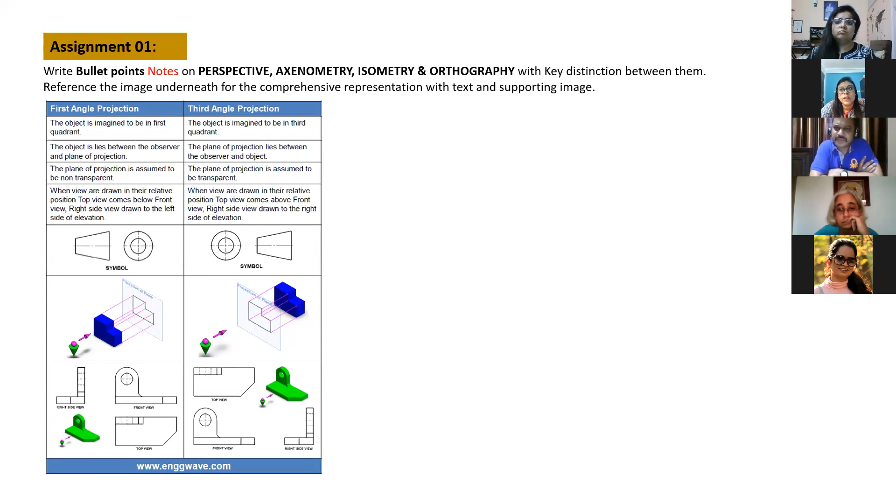Can someone tell me one characteristic of perspective? So everything vanishes at one single point, or two, everything radiates from either 1, 2, or 3 points, whereas in isometric or axonometric, all the lines go parallel. Okay, the basic 3 lines will go parallel, 1 perpendicular of course to the gravity, and 2 would go parallel. Whatever you make, things would be parallel, they will never vanish, they will never touch each other like that. Anything else? It is a tool to visualize.

Yes. And it is a freehand drawing with vanishing point. Okay. Yeah, its perspective is basically, you create distance.